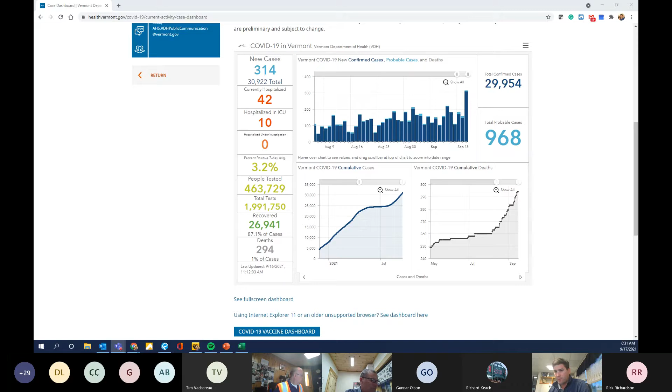This week's code of conduct is to maintain respectful behavior whenever one is working, driving a company vehicle, or wearing the company logo. You're always representing this company.

Any words of wisdom for us on this code, Adam? Yes. What people see determines our reputation. It's not always our intent, but it's what they see in our conduct. So let's be professional out there.

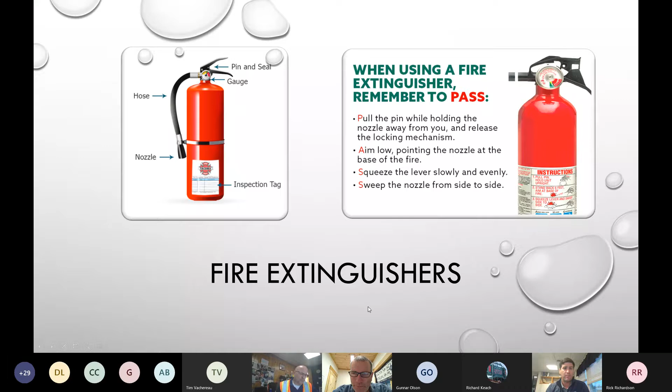Important stuff. On a personal safety note, as a lot of people know, I have a fishing boat. And on a boat, you don't have the opportunity to step away from the fire. It's not about getting out of the fire, it's putting it out, because until help arrives, there's no help.

So the fire extinguishers on your boat, if you have a personal boat large enough for fire extinguishers, you have to be very careful about maintaining them and keeping an eye on them. What I actually have is two of them on board that are very visible, not just hidden underneath. Good point.

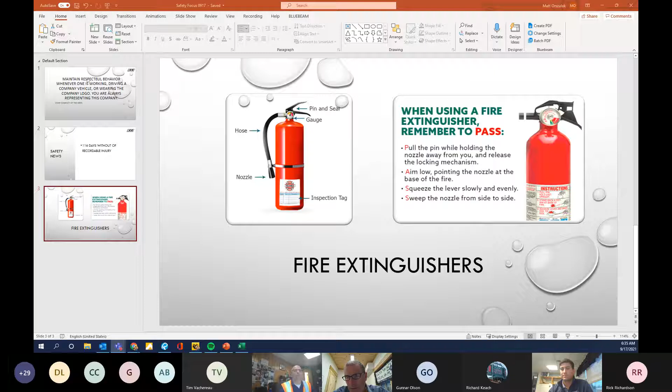Okay, I'm going to switch over to my screen. Oops. Sorry.

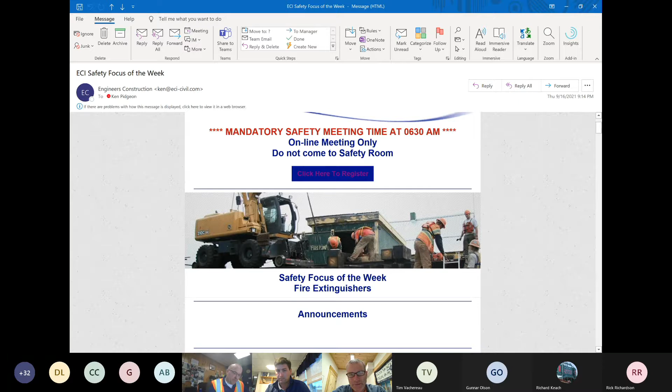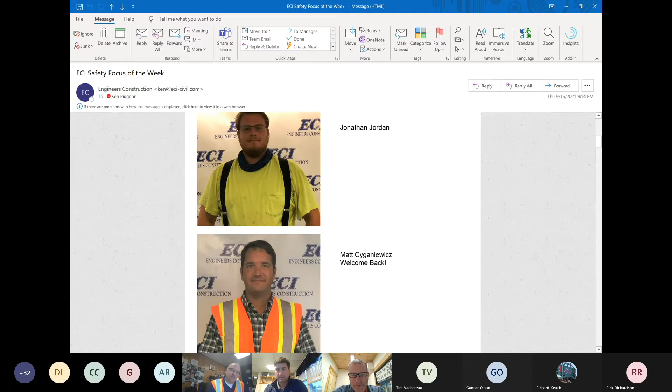I've got the primary care health care wellness program link here. I understand this is really gaining momentum and getting popular, so if you haven't set yourself up and enrolled in it, check it out. It's easy to do, it's just probably 1 hour.

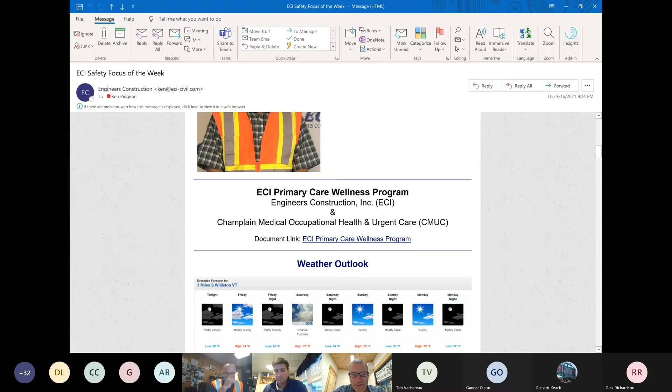Healthcare check at Champlain Medical to get you off and rolling on it. Weather outlook looks good. One thing I forgot to note is that the first day of fall is like Wednesday, is that right? Wow, it's moving along. 2021 is approaching the last quarter.

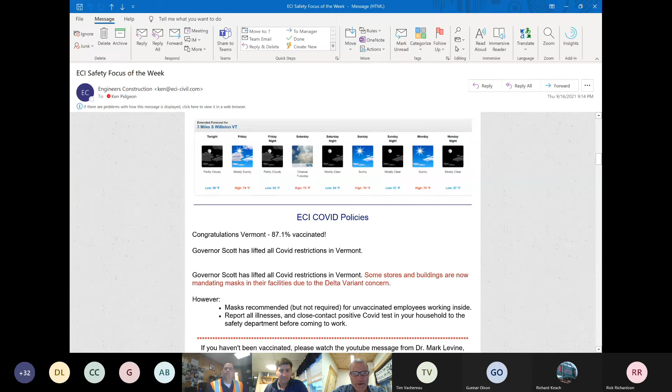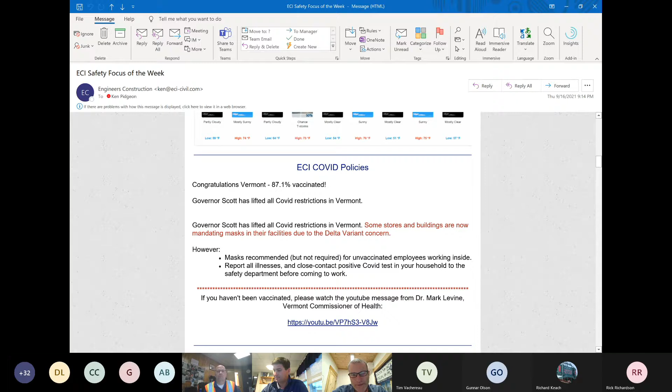For the COVID policies, congratulations Vermont, we're up to 87.1% vaccinated, which is great. As we heard last week, there's some mandates coming on vaccination. So if you're on the fence, just go out and do it right now. If you're against this, well, you may not be able to avoid it, so gotta think that out a little bit.

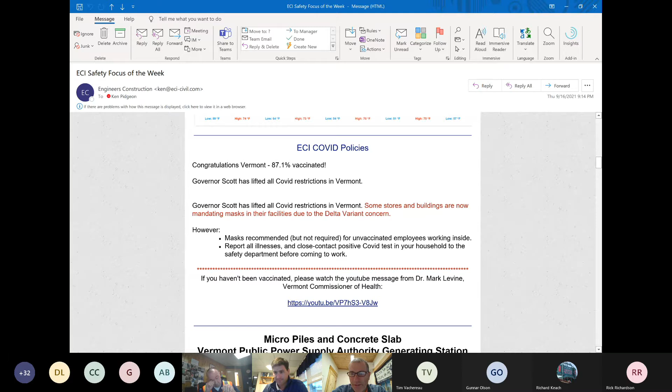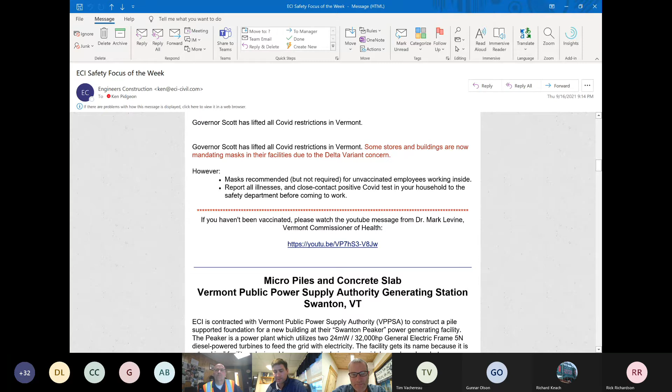I think the mandates are probably several weeks away, right Matt? This is something OSHA has to prepare a regulation or rule, which takes time. They have to write it first, and then it has to go through a comment section, so we're months out. But like you said before, it's going to happen, it's inevitable.

For projects this week, we're profiling the micro piles and concrete slab for the Vermont Public Power Supply Authority generating station. They're up in Swanton. We're contracted with this VPPSA, you might have seen them around, I think they're on 100 too. They've got a sign there in Stowe right near the road.

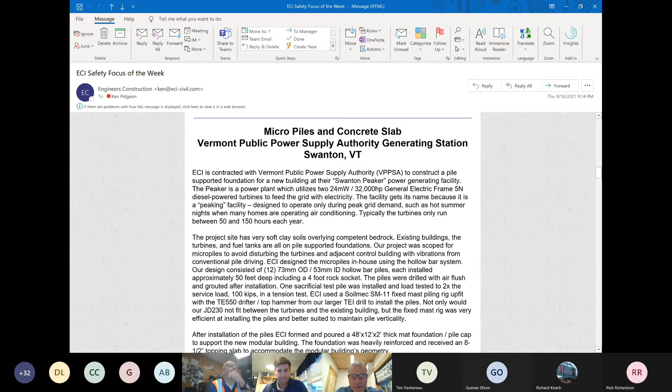To construct a pile-supported foundation for a new building at their Swanton Peaker power generating facility. The Peaker is a power plant which utilizes 24 megawatt or 32,000 horsepower General Electric frame 5N diesel power turbines, which are essentially just big jet engines running off diesel. They provide power to the grid, and it gets its name because a peaking facility is designed to operate only when peak demand is there, when normal, less expensive generating power systems are not available or can't perform to meet the needs, especially on a hot summer night when many homes are operating on air conditioning, as we saw earlier in the summer.

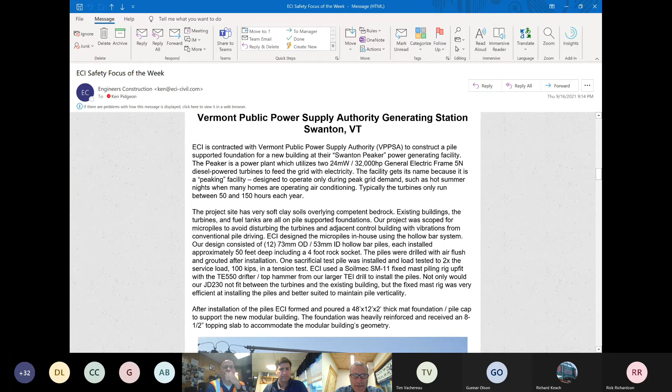Typically, these things only run 50 to 150 hours each year. I wasn't on site when they did it, but on one of the hot days they were expecting to run it, and I think they did. Also, they do test startups like weekly or something like that. It's supposed to be quite the sight, or sound too.

So the project has very soft clays overlying competent bedrock, and the existing buildings, turbines, fuel tanks, and others are all on pile-supported foundations. Our project was scoped to micropiles to avoid disturbing the turbines and adjacent control buildings, because you don't want to drive H piles next to these sensitive pieces of equipment.

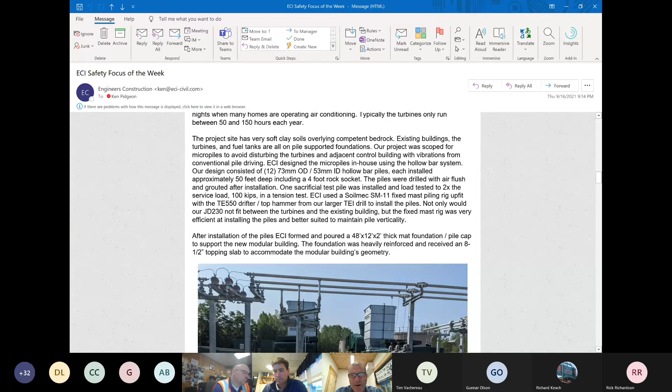We designed the micropiles in-house using hollow bar systems, and our design consisted of 12, 73 millimeter outside diameter, 53 millimeter inside diameter hollow bar piles, each installed about 50 feet with a 4-foot rock socket. The piles are drilled with air flush and grouted after installation. We did one sacrificial pile for a load test at twice the service load, or 100 kips, 100,000 pounds, in a tension test.

We used a Soilmec SM-11 fixed mast pile rig upfit with our TE 550 drifter, which is the top hammer drifter from our larger TEI drill, that's an excavator mounted drill, not our JD 230, which the TEI drill is hooked to but wouldn't fit in there. This other rig provides better verticality for pile installation.

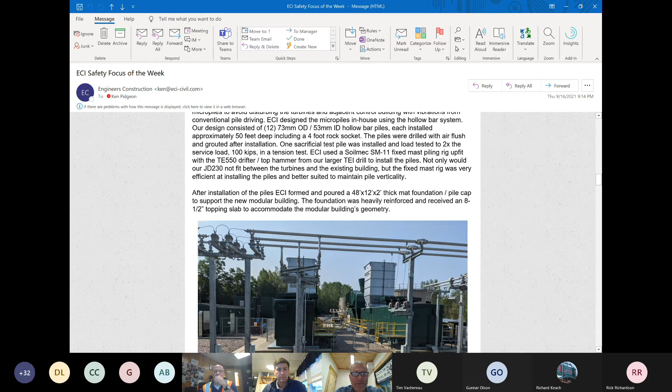After installation of the piles, ECI formed and poured a 48-foot by 12-foot by 2-foot thick mat foundation supported by these piles for this new modular building.

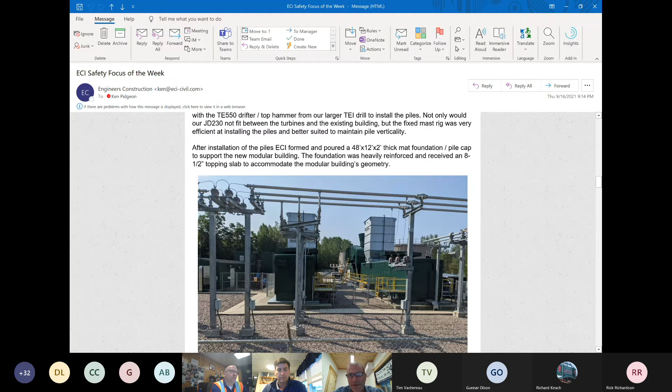The foundation is heavily reinforced and received an 8.5-inch topping slab to accommodate the modular building geometry. A lot of concrete there.

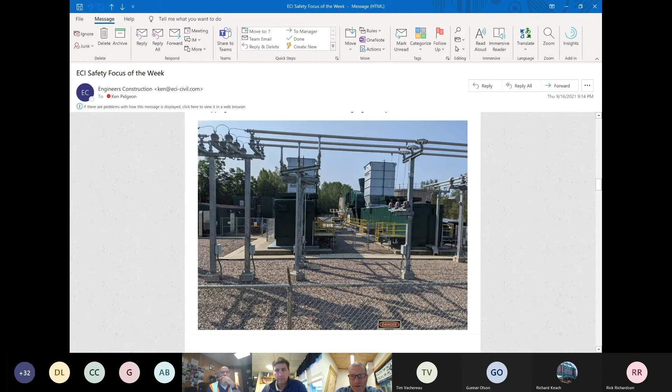You can see the turbines are in these green cases, and the gray stacks on top are some of the emission controls. These are the size of locomotive engines, really, but they aren't locomotive engines, they're jet engines in there.

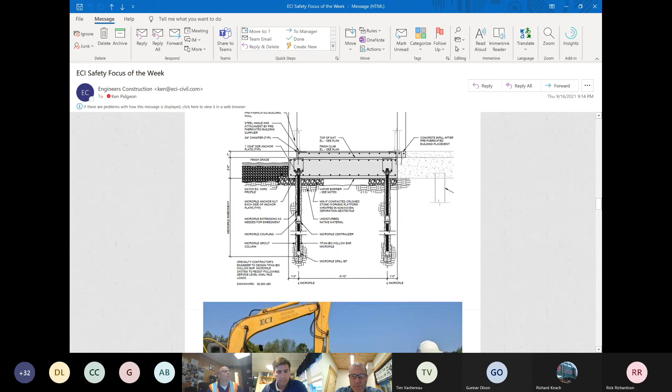This is during the pile load test. We had a couple of heavy beams to put the reaction out away from the pile, and then there's a load cell and a hollow jack in there, kind of in front of Nate's head.

With some dial gauges. Dial gauges are supported off that steel angle from a concrete form angle, supported by the tripod, so it's independent of the loading frame.

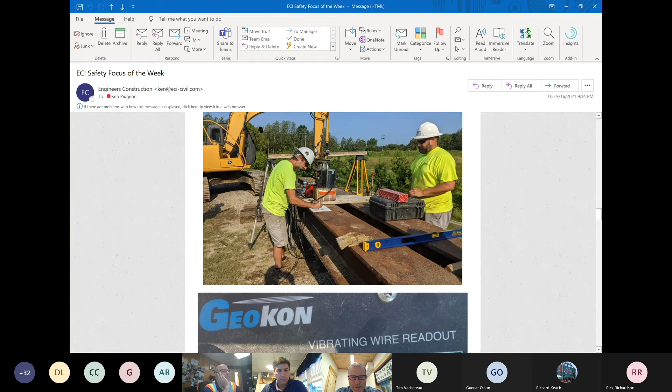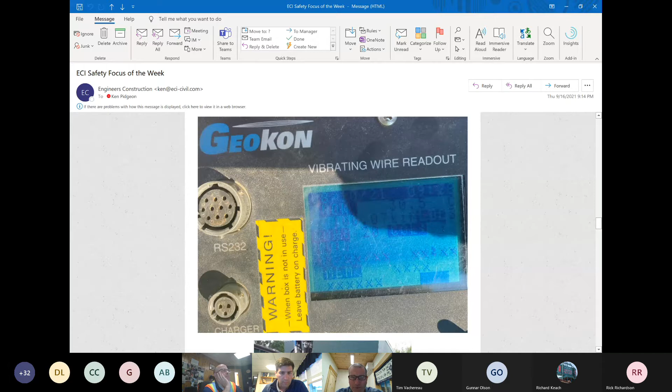The vibrating wire strain gauges within the load cell are reading out 100.07 kips in this photo here, so that's at the peak load.

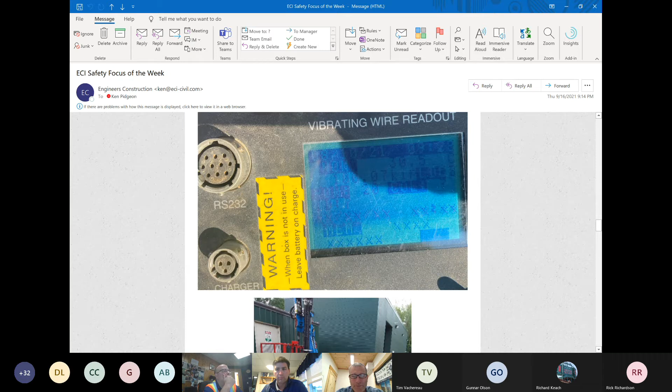At the peak load, we had only just a little over 0.8 of an inch of movement, and that's including the stretch of the bar. So great results on the load test.

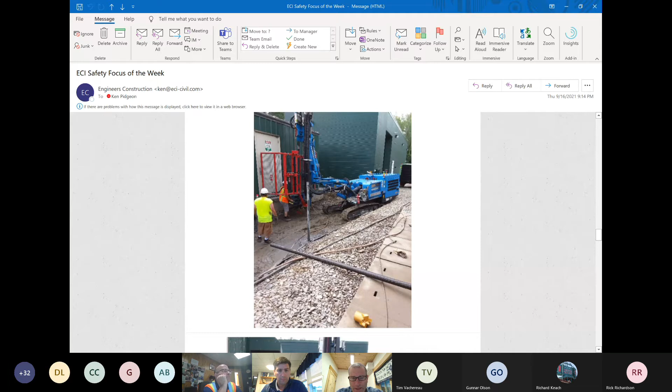There's the rig, it's got a protective cage. When they're drilling, I think just Dan's in there setting it up, and then when you're drilling, the cage is closed. There's some of the drill steel in the foreground of that picture, and a bit.

So the bits are sacrificial bits, hollow bar. You drill down, leave the bar, and they're flushed with air, and then they inject grout after the fact to give it the grout bond to bond the rod to the rock, really is what you're concerned about, but it's grouted all the way up through the clay, and the grout provides corrosion protection there too.

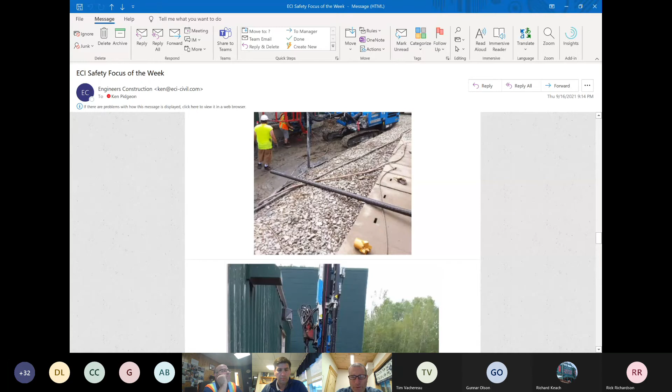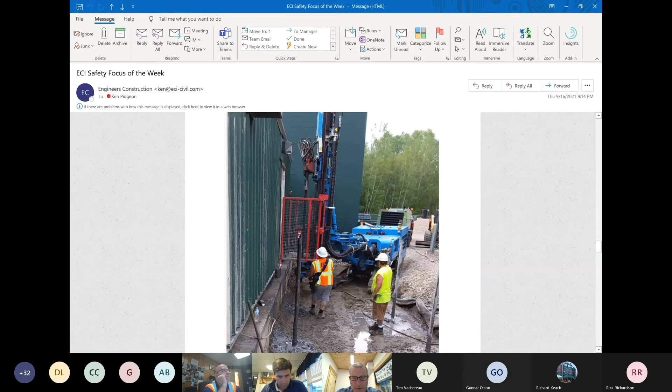There we are with the cage door closed off drilling. Drifter is the red piece at top, so it's a top hammer thing versus down in the ground, down hole hammer.

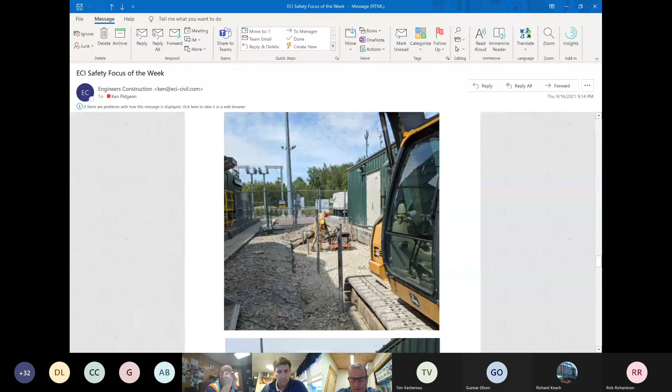Several of the piles are already installed there. And then they're backfilling, 12 inches of stone under the slab, and then they'll cut off the piles.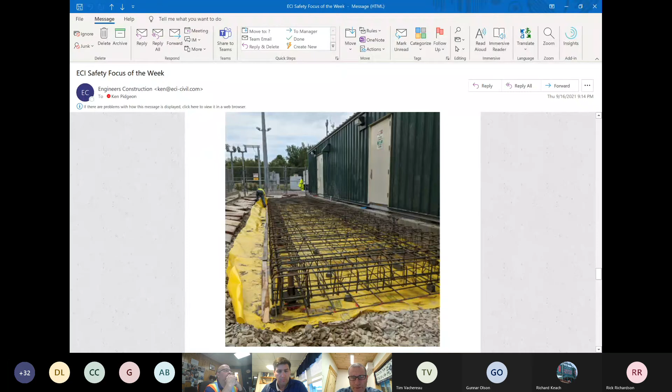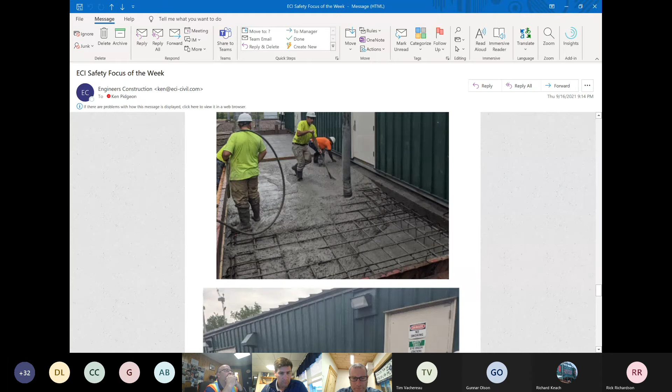And then pouring. It's trailing off.

Vibrating. And then the finished base slab with the dowels that go into the topping slab at a later date, which is now done.

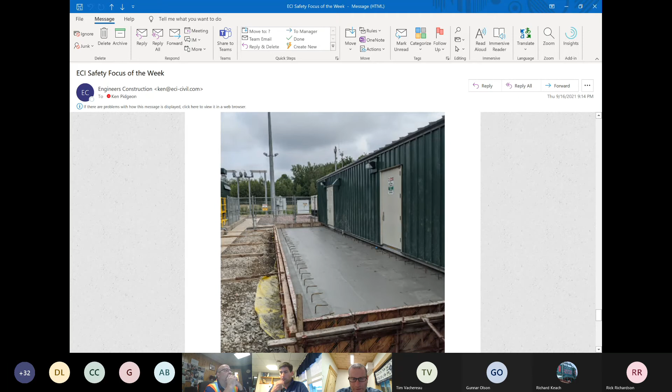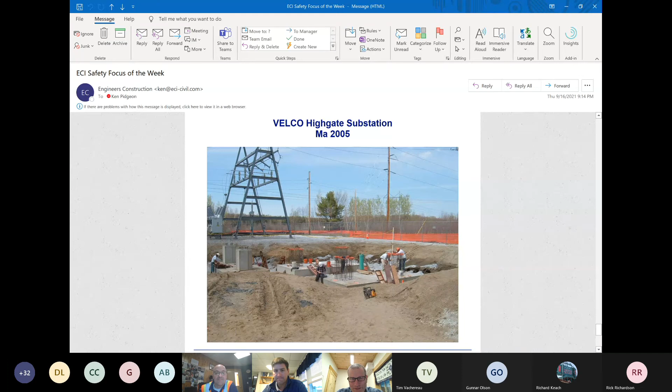The Y got dropped on the May, 5, so that's what it was. You can see it is May, it's just barely some green on the trees in the background there.

We're putting in some foundations for an improvement at the Highgate substation.

Way back then, I see John Zeno, can't tell who else is on the site. Might almost look like Paul, Paul What's-his-name, Brunton. Paul's over there on the corner, on the left, and I'm sitting on the slab with my field book.

Oh okay, yep I see. I don't know who's with Zeno. I saw some other photos, and his son Ryan was working for us then. Oh yeah, yeah, that could be right, might be Ryan. Yep, so Aaron would know.